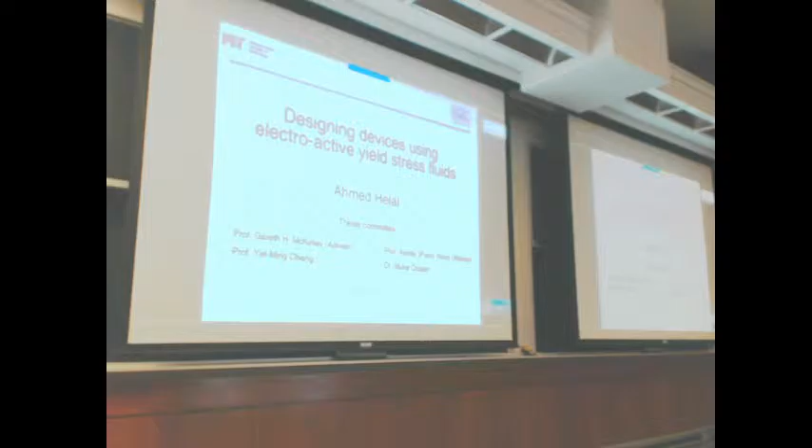Hello, hello, how's it going? You ready? What? It'll be fine, everybody's fine. By the time you get to the stage, it's fine.

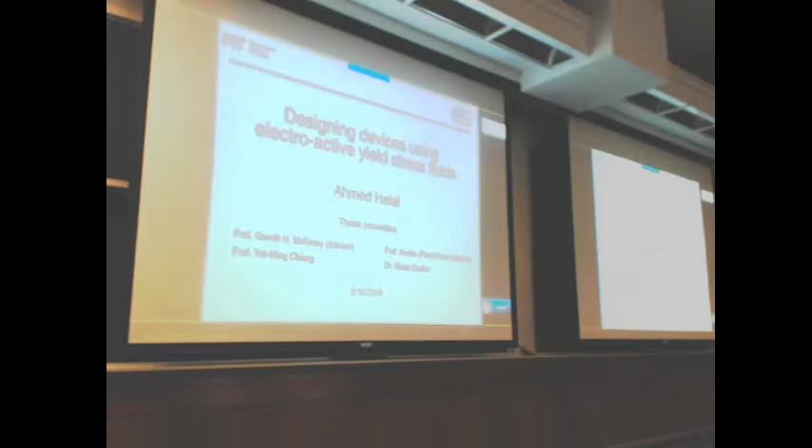Do you think people are watching? 4 people watching. One of them is his parents, probably one of his brothers, I'm assuming. I don't know the name. His parents for sure, and he's a supervisor. He's one of the first guys out here. Maybe some random people that ran into this.

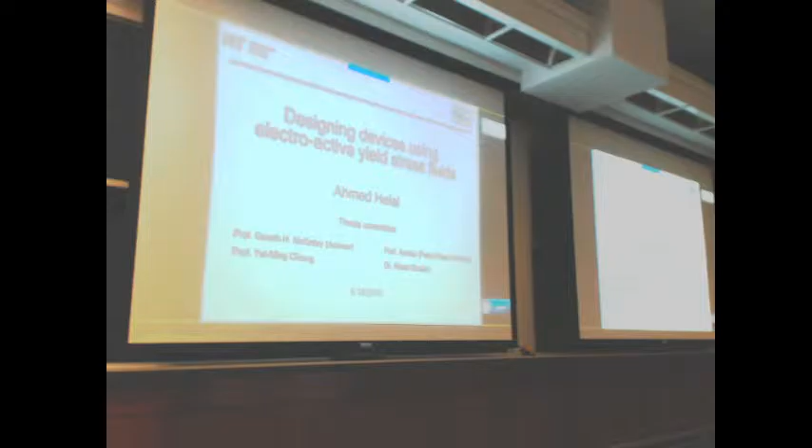Good morning, everybody. It is that time, so we are assembled, and I happened to get a chance version to see Ahmed's invitation to you all. So I know there's a Game of Thrones theme floating around here. This is actually GOT, as in Game of Thesis. And Ahmed is about to roll the dice and play the game, and we'll see if he ends up a White Walker or a graduate.

But to start with, I'd like to say a few words about our candidate today. He came to MIT in 2009, coming from Paris. He was from Egypt originally, but he grew up and spent a lot of time in Paris and going to school there.

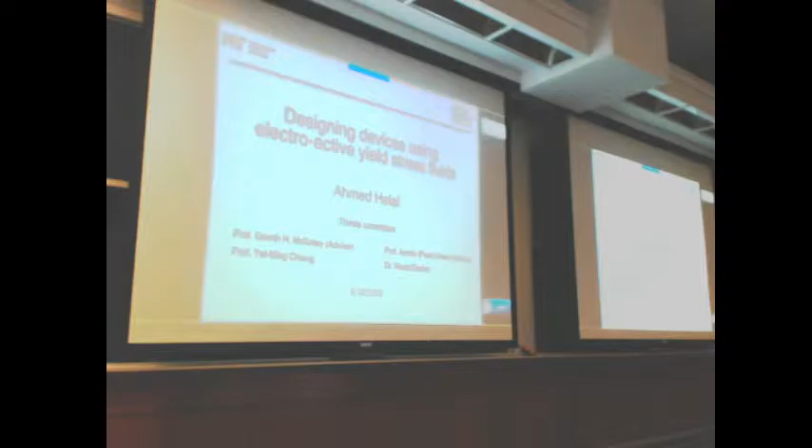One thing I like to do is go down to the archives and dig out the original application essay for said person. When you write the essay to grad school, you think, oh, no one reads this, right? Oh, yes, we do. And you'll notice that Ahmed has one word that he likes to use a lot. But anyway, amazingly, he hasn't strayed too far from what he wanted to do.

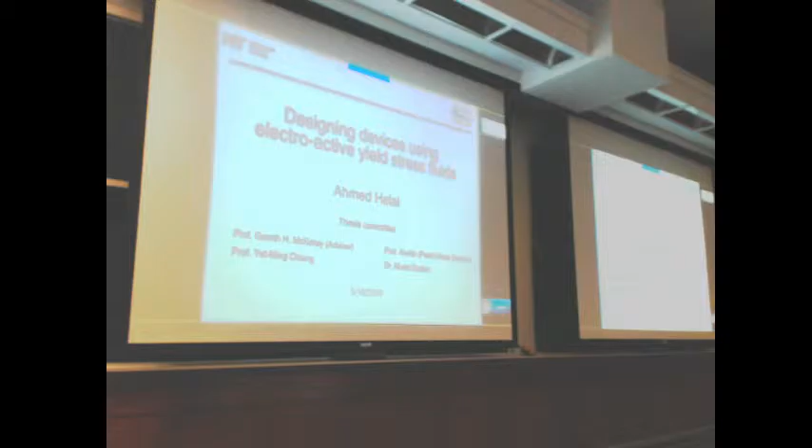He said in his application that he wanted to work in the field of soft matter, and discovered how research in soft matter is interrelated with fields as diverse as biology and electronics, and we're going to see some electrical work here, as well as combining both fundamentals and applied aspects. I think that's something true you'll see in his thesis.

Going on, he told us that during his time in Paris, at the French Grande École, he developed a fondness for physical phenomena and their explanation. I think that's a very French term, to have a fondness for something. We like things that the French have fondness for.

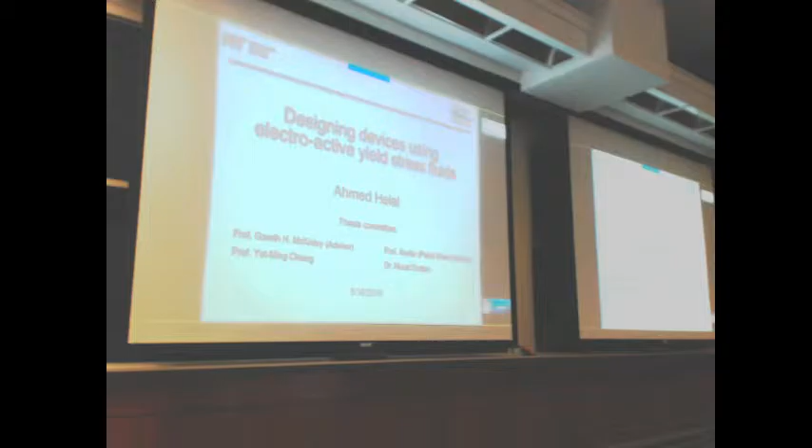So he spent some time with David Quéré, who many of you know, and a class from David Quéré really ignited his interest in soft matter. Then he actually did a microfluidics lab with a guy called Charles Baroud, and he was actually one of those visitors who spent 3 months in my lab when I was at Harvard a long time ago. So there's a connection there - he came as one of those kind of 3-month visitors, and he's gone on to a very successful career there.

And then he spent 6 months doing work at Schlumberger on cementing fluids. Schlumberger is a connection that we've had here over a number of years as well. So he was getting interested in complex fluids more and more and more.

And then, of course, in your essay, you transition to trying to sell yourself to the committee, right? So here's the chain he goes. He explains that he spent some time in Paris, some time in Egypt, and he says, I possess a cosmopolitan outlook. So, does this guy have a cosmopolitan outlook?

Yeah, I'd say so. And then again, I have a fondness for discovering new things and new people. So I hope that he spent some time being very fond of new things and new people while he's here, as well as an adaptability to different situations. I think that certainly summarizes what coming to grad school at MIT is all about.

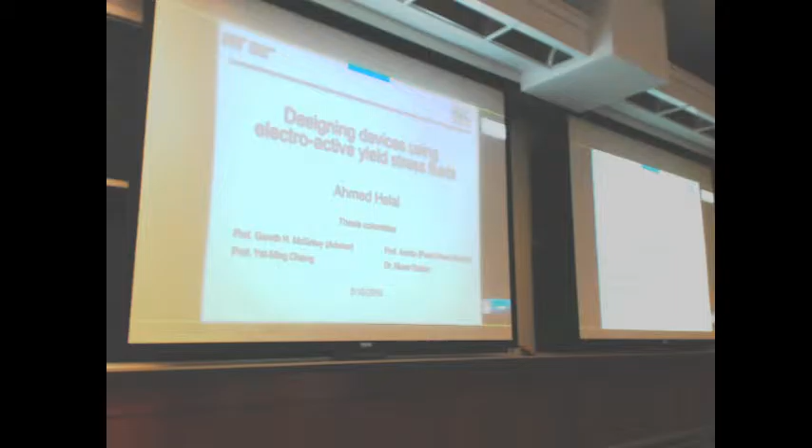And then he ends with saying, in particular, I find Professor Gareth McKinley's non-Newtonian fluid dynamics program appealing, not fond, but appealing, as it dwells on original phenomena in complex fluids. And so, in this case, it's someone who actually came, saw what they wanted to do, and has really strived to get there. And he says, I want to work more particularly on fluid hydrodynamics. So you're going to hear a lot of that.

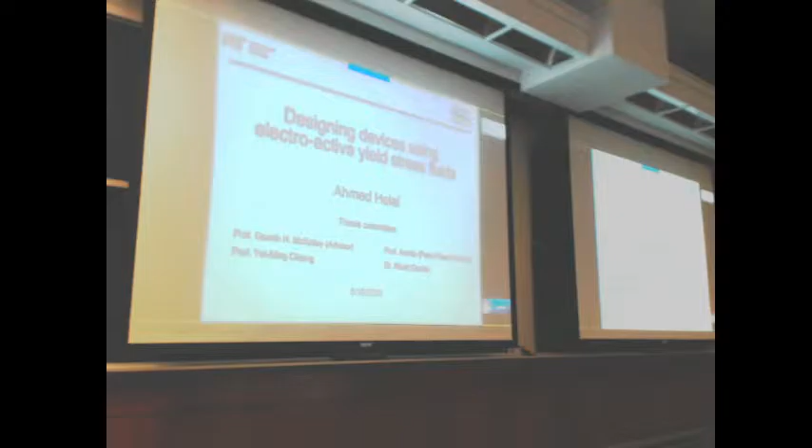But even then, Ahmed was thinking beyond a PhD to what he might do after that. He points out: after obtaining my PhD, I would like to pursue further research. I hope to discover something that will be revolutionary in these common but highly sophisticated materials, and which may mark the passage for a new era that I believe is possible by a deeper understanding of such fluids.

And he's planning to go to work with a company called 24M, which works on very complicated non-Newtonian fluid, but indeed I think you are going to do exactly what you planned all along. So, coming back to the Ned Stark and Game of Thrones thing, I guess I'll be playing the role of Ned Stark today. And instead of a song of fire and ice, what you're going to hear is a song of electrorheology and carbon black. Ahmed. Thank you, Gareth.

Thank you all for coming today. I'll be talking over the next 50 minutes about designing devices using electroactive yield stress fluids. Let me start by defining what yield stress fluids are.

Yield stress fluids are very common in our daily lives. You see them in materials such as toothpaste, face cream, ketchup, and shaving cream. They're basically materials which have a solid-like property, but if you exert some force on them, they will start to flow, like ketchup, for example.

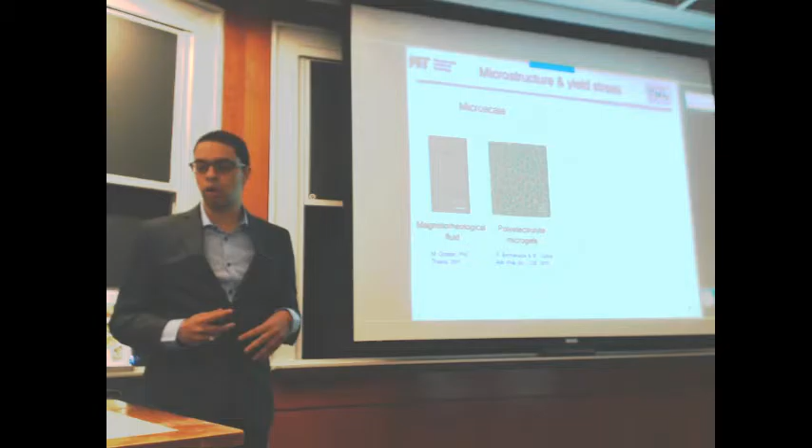They're interesting fluids to build devices with because they can provide functionality due to that nonlinear aspect of their rheology. The reason they have this nonlinear rheology is that they have an underlying microstructure with elements that interact with each other, giving rise to what we call a yield stress.

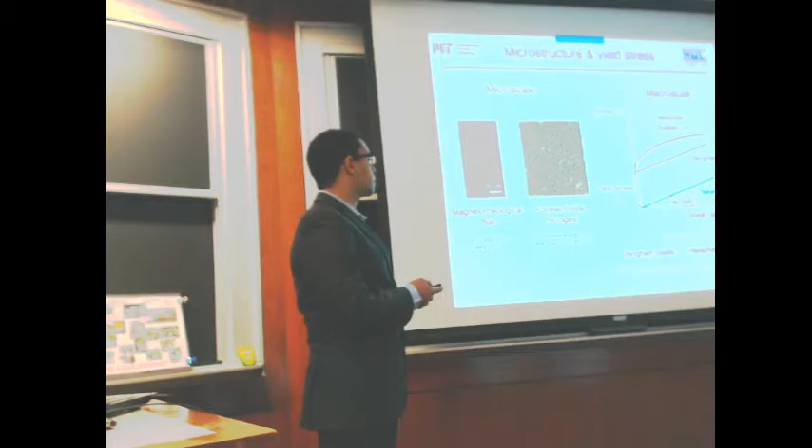When you look at the macro scale, I'm showing here a flow curve, plotting stress versus shear rate. If you take a material like water or oil, the slope has a constant value, and it's related to the viscosity of the fluid.

For yield stress materials, you have a yield stress, and you have to overcome that stress for the material to start flowing. We define two common types of models for these materials: the Bingham plastic model, where after yielding it has a constant plastic viscosity, and a more complex model like the Herschel-Bulkley model, which has shear thinning and more complex behavior once the material has yielded.

We're going to be particularly interested in electroactive yield stress fluids, meaning fluids that have some interaction with an electric charge or an electric field. We're going to look at two specific cases of those fluids over the length of the talk.

Electrorheological fluids are materials which change their properties from solid to liquid with the application of an electric field, and we're going to apply them to build small valves for hydraulic robots. You can think of this case as the low conductivity side of the spectrum, where we want to control the electrical properties of the material and see a mechanical change.

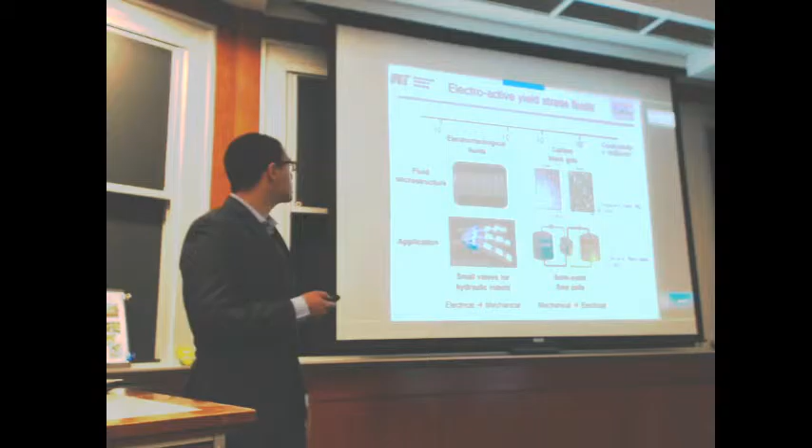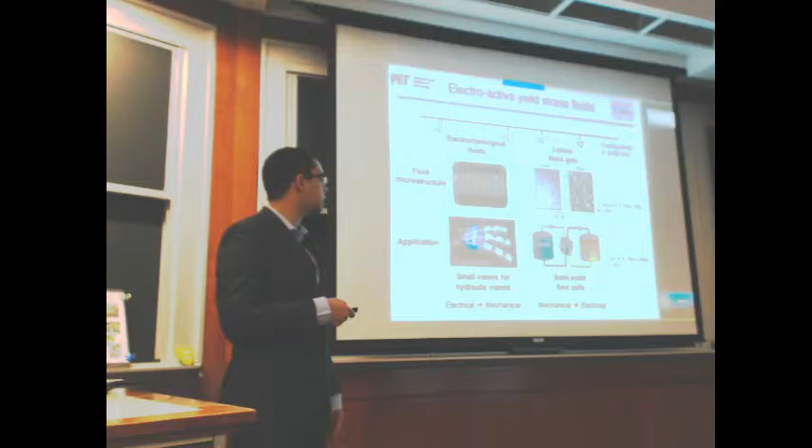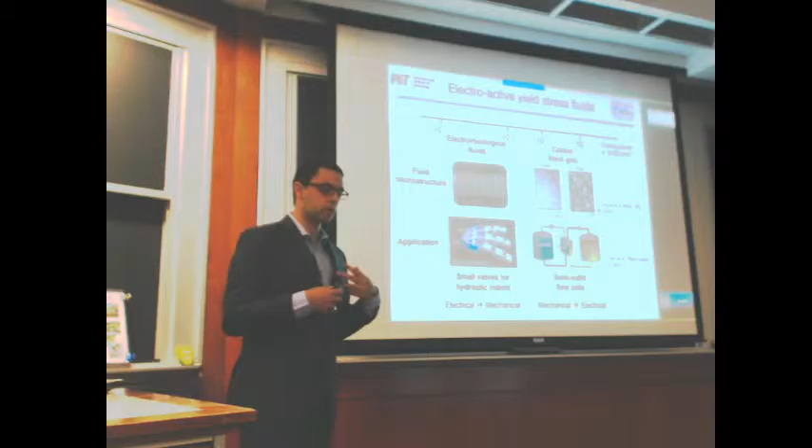The other fluid we're interested in are carbon black gels, as Gareth said, which are higher in conductivity, and we want to use them for semi-solid flow cells, a concept I'll introduce a little later in the talk. Here we're going to do the converse of what I just mentioned: controlling the mechanical properties of the material and then trying to measure and control the electrical properties.

This talk has three goals. First, we want to understand the interaction between the electrical and mechanical properties of these fluids through experimental characterization. Second, we want to develop instrumentation and methods for characterizing and modeling these materials to gain deeper understanding. Finally, we want to link this material-level understanding to design rules for devices at the system level, seeing how material properties can inform design.

We're going to do this for two distinct classes of fluids, the ER fluids and the carbon black gels, and then apply them to robotic ER valves and flow cells. So for the first part of this talk, I'm going to focus on electrorheological fluid characterization.

As I mentioned, electrorheological fluids are basically non-colloidal suspensions of particles that are about 2 to 5 microns in a dielectric medium. The nice thing about them is they have a reversible liquid to solid change with an electric field.

If you look at this video, when the field is applied, the fluid doesn't flow between the electrodes, and when the field is removed, the material flows. This behavior is reversible.

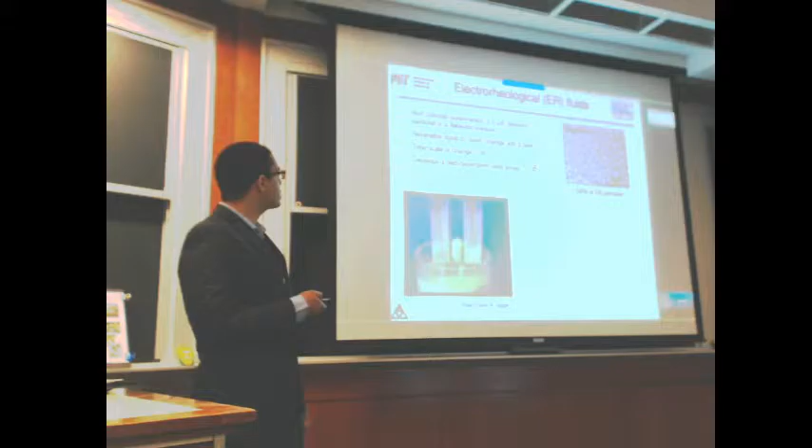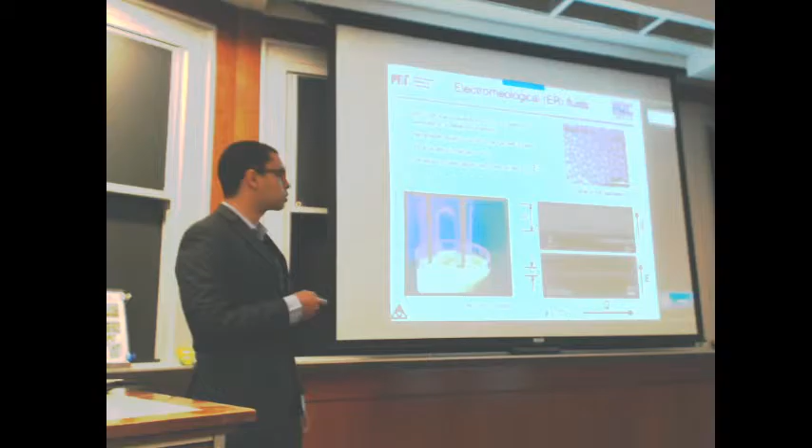The reason we have a yield stress here is because when we apply the field, the dielectric particles chain up and form chains that give rise to this yield stress. As you can see in the second video, this shows that the behavior is reversible, as I mentioned.

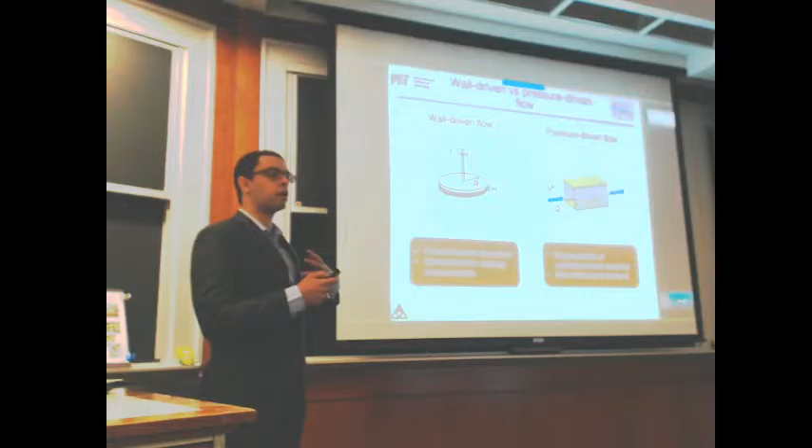We're going to study the electrorheological fluids using two different types of flows. We can look at wall-driven flows, such as torsional rheometers, which are basically the standard for rheology characterization. To define the term rheology, it's basically the science of how things flow.

We want to use this type of flow to understand the fluid flow behavior. On the other hand, we can also look at pressure-driven flows, which are more representative of the applications, such as valves, but are not as standard and more difficult to implement.

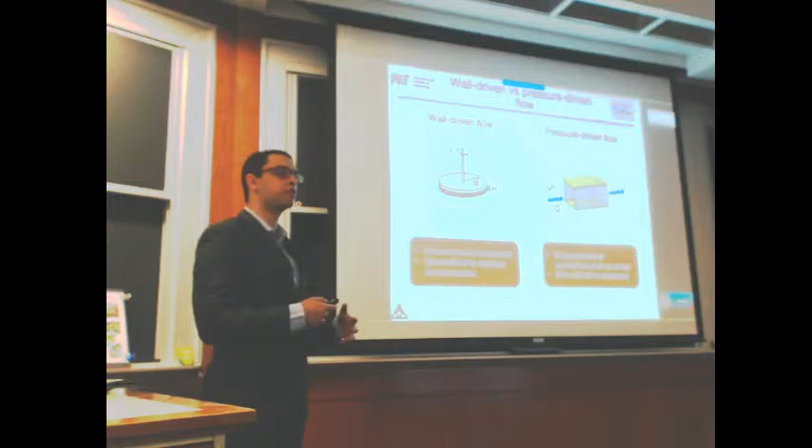What we ideally would want to do is characterize the materials using a wall-driven flow and apply that to pressure-driven flow, so we don't have to build 100 valves to test the fluids. That's what we're going to do.

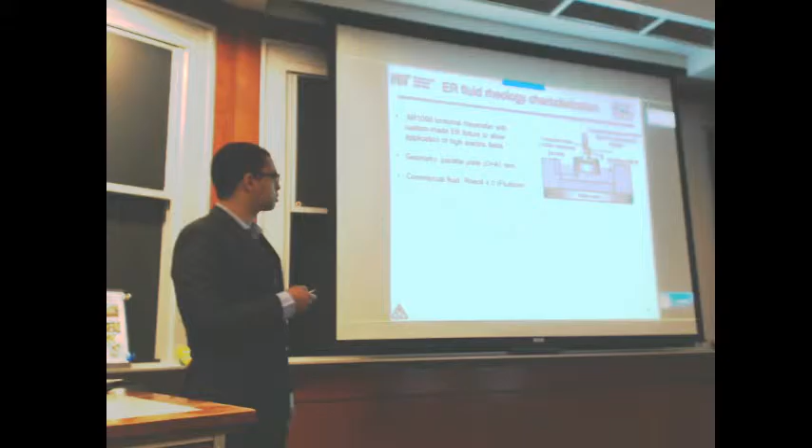We're going to look at wall-driven flow of ER fluids. We built a torsional rheometer with a parallel plate geometry, using a custom-made fixture that uses conducting salt to close the circuit, allowing us to apply high electric fields on the sample and measure the rheology as we apply the fields.

We're going to be using a commercial fluid called Rheoil 4.0 that has been optimized for commercial use and has a very low current density.

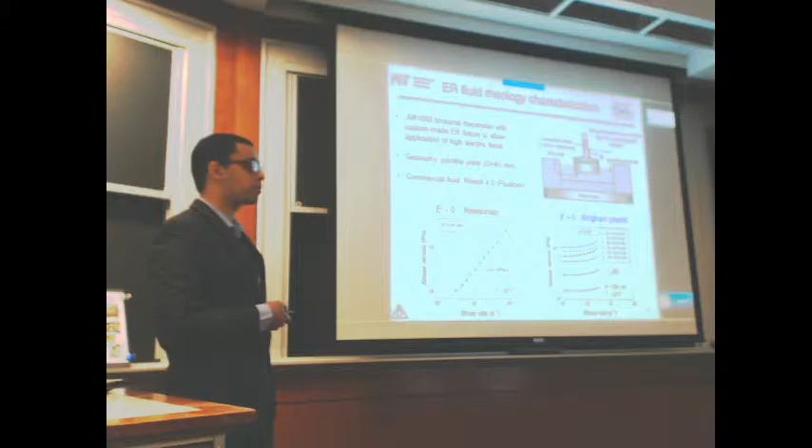If we apply an electric field, we basically have a yield stress material where the yield stress depends on the electric field, and we can model it as a Bingham plastic material.

If we look at the effect of the electric field on the yield stress, we see two things: first, that we were able to get yield stress on the order of about 100 pascal to about 1 or 2 kilopascal, and that the yield stress has a power law dependence of 3/2 with the electric field.

This is when we're higher than 1.5 kilovolts per millimeter. Keep in mind we're applying very high fields here to get this change in the material.

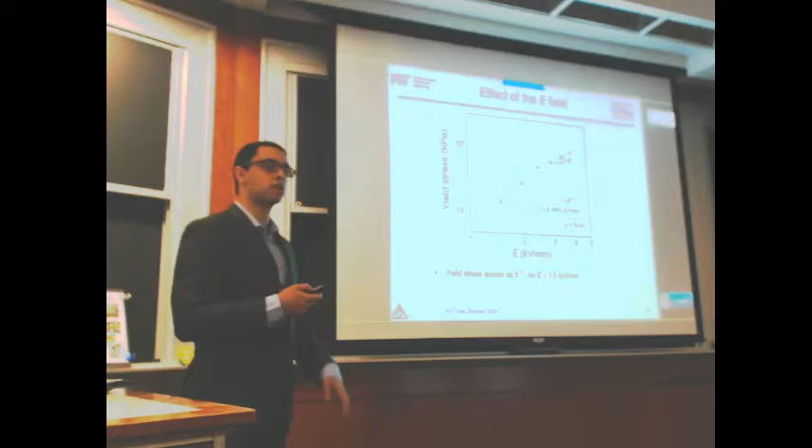We've now modeled and understood the rheology of that material using a wall-driven flow. If we now try to look at a valve and the yield stress we can extract from that pressure-driven flow, we see there's a discrepancy between the two. With wall-driven flow, we're underestimating the yield stress, and we don't understand why.

This is going to be a problem if you want to use rheometers to characterize these materials. So we want to dig a little deeper and try to understand the origin of this effect.

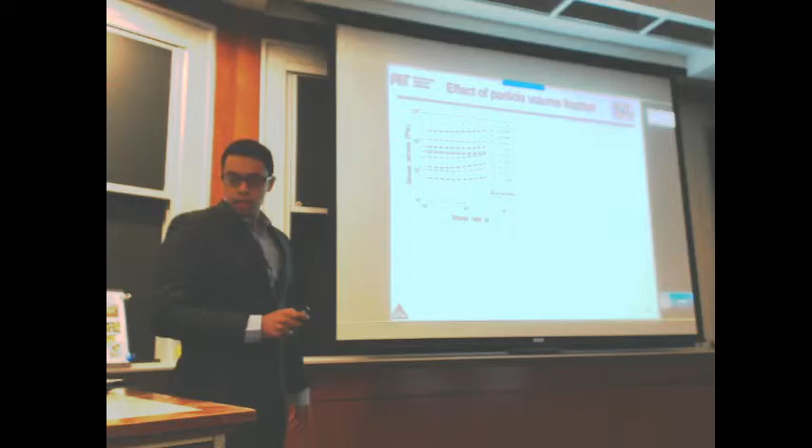There are two parameters that control the yield stress of the material: the field, which I already showed you affects the yield stress, and the particle volume fraction of particles in the fluid.

We went ahead and created a series of fluids with volume fraction varying from 0 to 55%, and we measured their rheology at a fixed field of 3 kilovolts per millimeter.

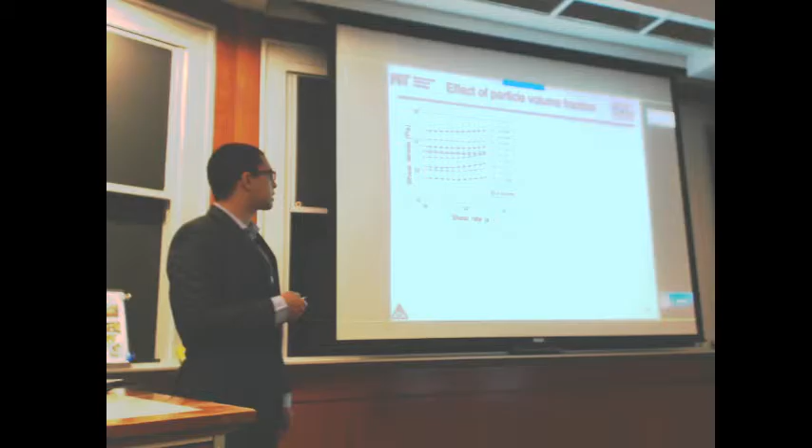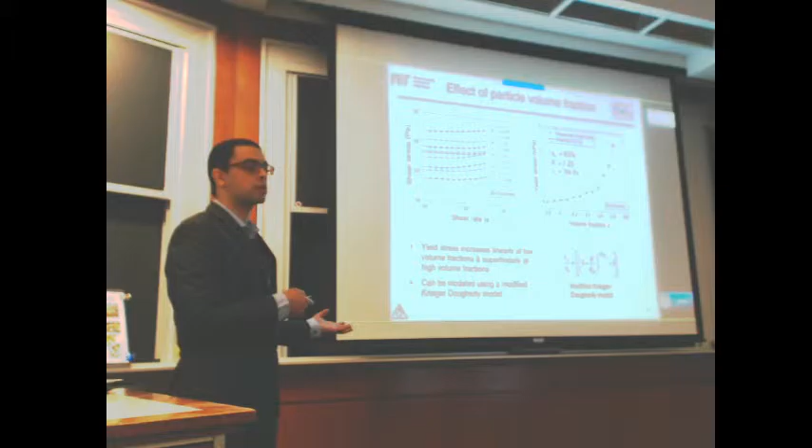If we now look at yield stress versus volume fraction, we see, as expected, that when there are no particles, we don't have a yield stress in the material. As we increase the volume fraction, the yield stress increases, initially linearly and then faster than linear at high volume fraction.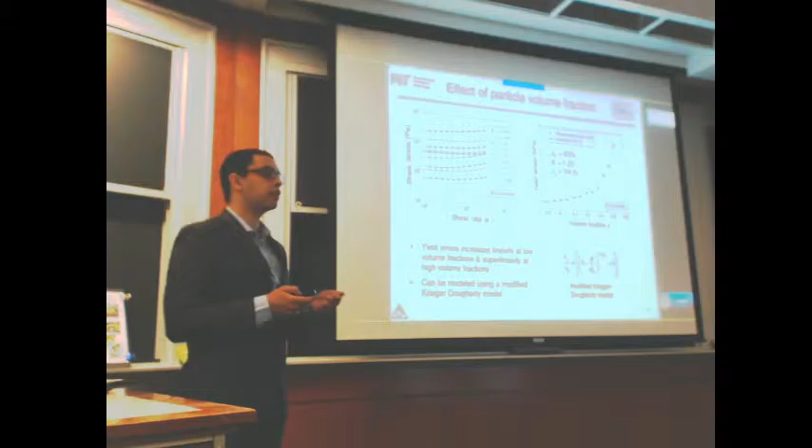We can model this using a modified Krieger-Dougherty model, and you can see that it is in good agreement with the data we show. So we understand how both particle volume fraction and electric field affect the rheology in a wall-driven flow.

So let's go ahead and look at the effect of doing the same tests in a pressure-driven flow. We designed some channels where we can apply an electric field across and visualize at the same time, as you can see here, and we went ahead and tested them.

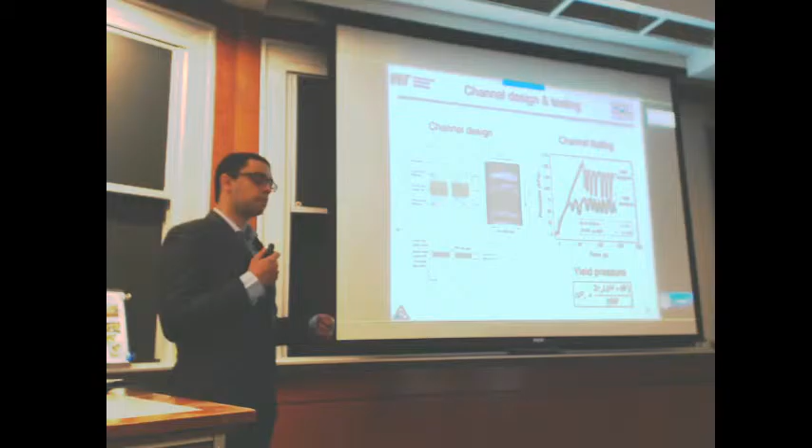The way we tested them is we basically pushed the fluid with a syringe at a given flow rate of fluid, and we watch the pressure rise in the channel. You can see that initially the pressure rises, and then when you reach the yield pressure of the valve, the valve breaks basically.

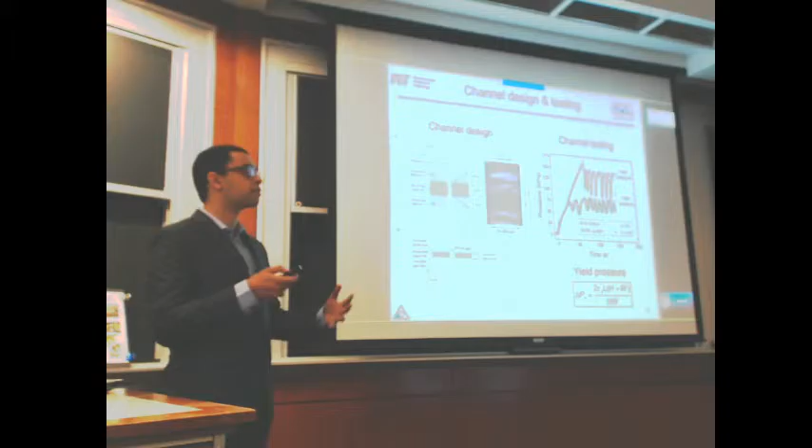You can see these oscillations because when the valve breaks, the electric field is still applied, so the particles chain up again and reform and close the valve again, and then the pressure rises again until you reach the yield pressure again, and that happens over and over.

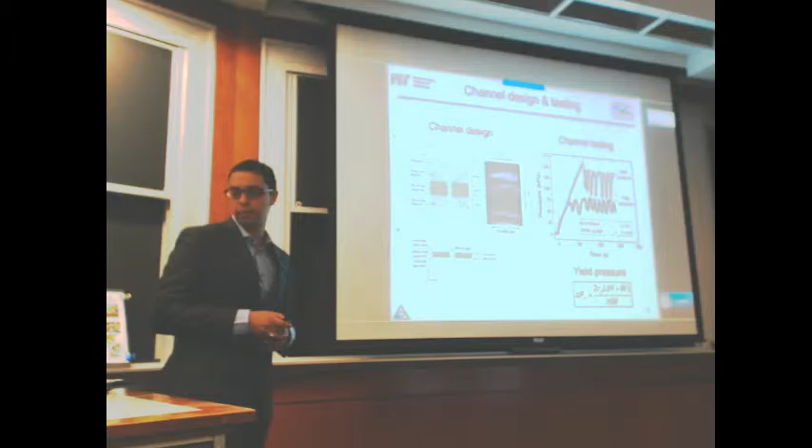We can do a force balance on an element of fluid in the channel, and we can relate the yield pressure that we measured here to a yield stress in that setup case.

Now let's compare, for all the volume fractions we measured earlier, the yield stress in the microchannels for different flow rates and the yield stress measured in the wall-driven flow. You see that for all the volume fractions tested, the yield stress in the channel is consistently higher than the yield stress measured in the rheometer.

The way to think about that is that the rheometer setup is basically a closed system. The amount of particles in your measurement is constant, versus in the channel you're introducing particles continuously, and the particles get stuck, causing an increase in the volume fraction in the channel.

The other thing we notice is that at high volume fractions, there's a saturation of the yield stress with volume fraction. We can think of this as particles getting into the channel and getting stuck until they reach a maximum packing fraction of about 53%, phi m.

So we wanted to model this behavior as well, and try to reconcile the differences between the wall-driven flow and the pressure-driven flow. We introduce a ratio of time scales in our system.

First, T alpha, the structure formation time describing how the structures form, which depends on the electric field, and then a convection time scale, which tells you how fast you're piling particles in your channel if you start from this volume fraction, with the max volume fraction being phi m.

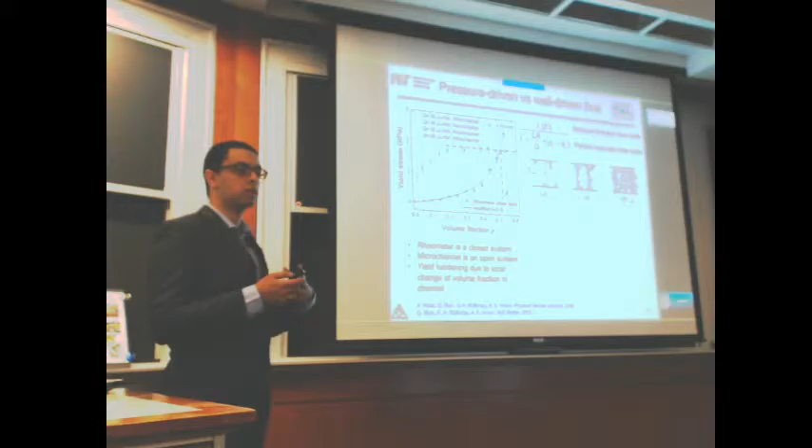We can look at the two extreme cases. In one, you apply a very strong flow rate and the particles don't have time to form structure, so you end up with practically an empty channel. In the other, you give the particles enough time to reach optimal packing in the channel, ending up with the maximum packing fraction we discussed.

To model this, we go through the permeability of this porous media and define the two extremes: the permeability at the maximum packing fraction, and the permeability of an empty channel with no particles at all in it.

We propose a phenomenological relationship that interpolates between the two using this time scale and an exponential function, and we relate that permeability back to the volume fraction using a relationship demonstrated on this specific fluid using optical measurement by Chen and previously in our lab.

So if we know the permeability that the material reaches for each ratio of timescales, we can extract the volume fraction that forms in the channel, and then look on the curve characterized in the wall-driven flow to get the yield stress at that point. The dotted lines represent this set of parameters for our model, and we see good agreement between our model and the data we collected.

So what we've shown is that we can basically understand the physics in pressure-driven and wall-driven flows, and we're able to reconcile the differences between the two. If we know the dependence of the yield stress on the volume fraction, we should be able to reconcile data we collected on the rheometer and data we collected in the channels, and do device characterization accurately.

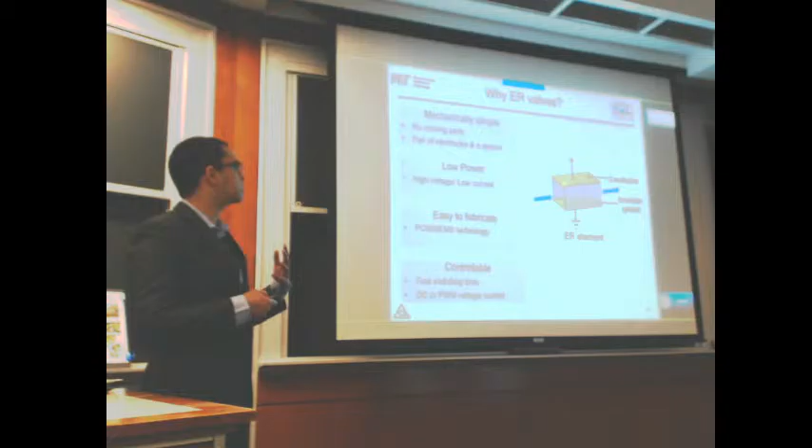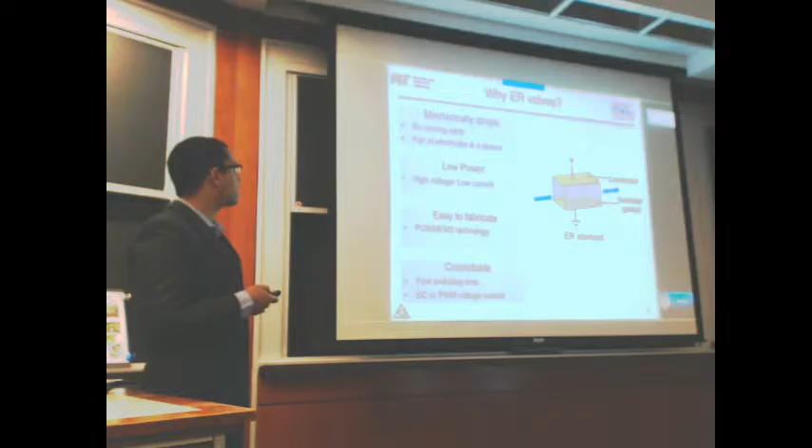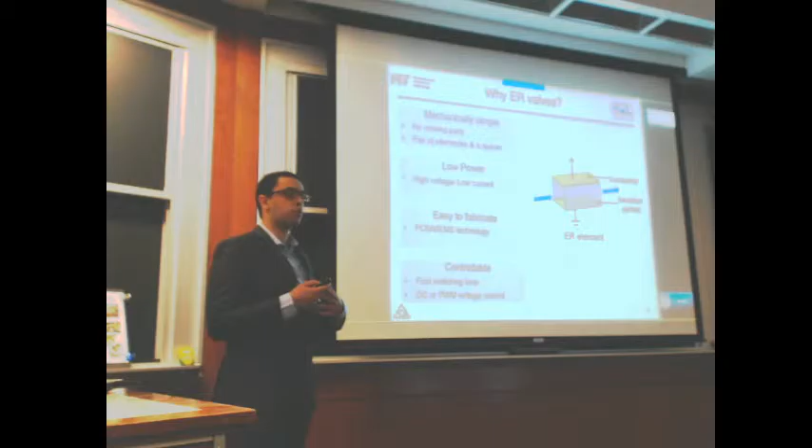The nice thing about ER valves is that they're mechanically simple. There are no moving parts—it's just a pair of electrodes and a spacer. They have low power: we're using a high voltage, or a high electric field, but the current is very low in the system.

They're relatively easy to fabricate because we can make use of existing PCB technology to make the device very small. And as I mentioned, they have a fast switching time because the fluid itself has a fast switching time.

The other nice thing about them: if you try to build small valves for robotics, you'll find that they're very big and very expensive, which prohibits the widespread use of small hydraulic robots. Versus ER valves, which are very versatile and can be made very cheaply using PCB technology.

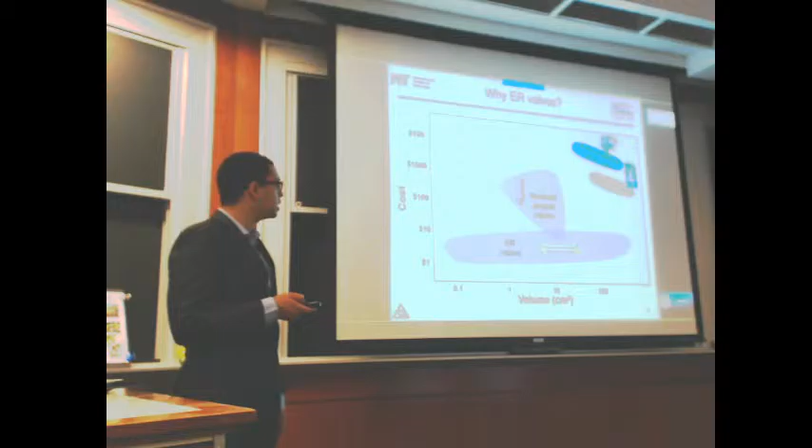So we investigated the valve design space, and in collaboration with Boston Dynamics, we were able to fabricate valve prototypes using PCB manufacturing methods. You can see here these are basically 5 or 6 parallel valves where the fluid is going through, shown from a different perspective to give you a sense of scale.

We were able to use these valves in designing a small flexible gripper, made as a tentacle, where you have different digits and the ER valve is controlling the flow between each set of digits. You can see precise control of the motion of the gripper using the ER valves.

It's nice because we're now able to use these valves for robotic applications, and there are other examples I'm happy to discuss. If you want to see more robots that use these things, you can ask me later and I'm happy to show you.

So that's what I wanted to say about the ER fluids—we were able to characterize them and build the valves and characterize their design as well. Now for the rest of the talk, I'm going to switch to carbon black suspensions and flow cells, starting again with the characterization part.

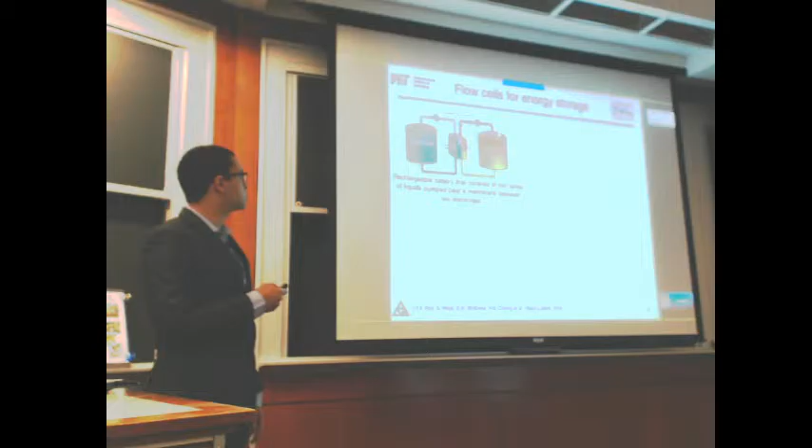Flow cells are basically a rechargeable battery that has two tanks, and you can pump the material from the cell back into the tanks to store it. This allows you to decouple the energy and the power of the cell, because the power is set by the size of the cell, but you can have a tank as large as you want, and that controls the amount of energy in the cell.

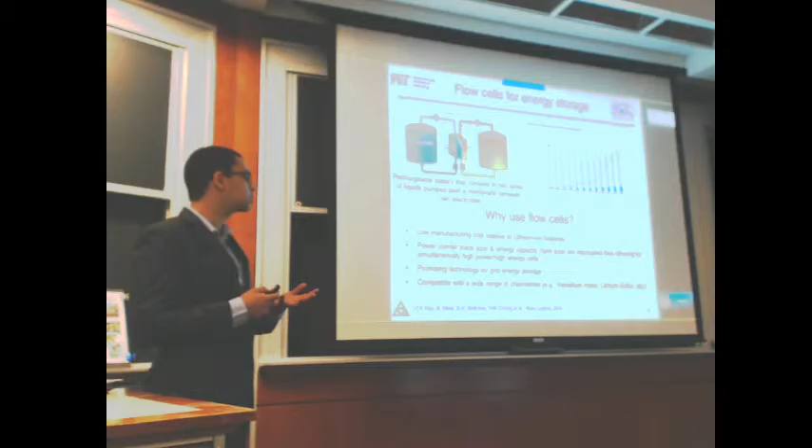So why use flow cells compared to other cells? There's a growing need for grid-scale energy storage because of the increased integration of renewable energy into the grid. As I mentioned, flow cells allow you to decouple energy and power, which allows you to have a high power and high energy cell through the design process. They're compatible with a wide range of chemistries, which can have very high energy densities, making them a promising technology, and they're low cost as well.

In a typical flow cell, you flow a Newtonian electrolyte solution through a stationary conductive electrode, such as a carbon felt or porous carbon felt. This can lead to large pumping losses and a very dissipative flow because you're flowing through pores that are very small in the carbon felt.

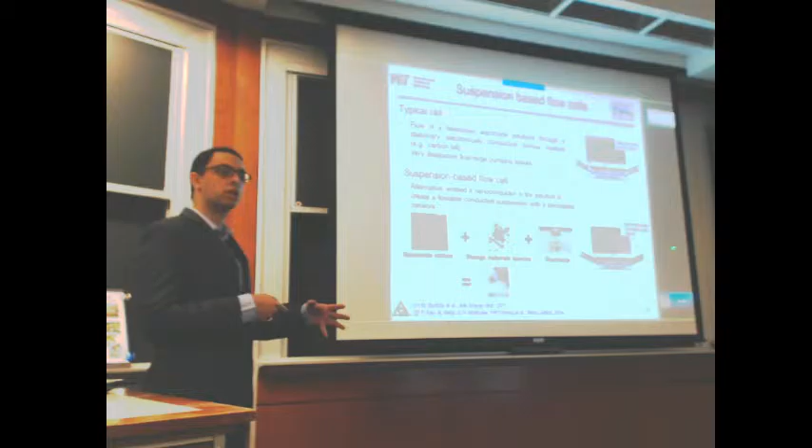An alternative approach, shown here at MIT by Professor Chiang's group, was to instead of pumping into a stationary electrode, embed the conductive material directly into the suspension and flow the whole thing through the cell. That's what we're going to call a semi-solid flow cell or suspension-based flow cell.

If you look at these pictures, you see that these are not your typical hard spheres suspensions. They're very fractal particles, and they have a short range of attractive potential, which causes them to basically form gels through a fractal network using diffusion limited aggregation.

So basically we have a fractal network at the scale of the particle and at the scale of the suspension. And we're going to be using that as a random conductor in the semi-solid flow cells.

We're going to be looking more closely at the lithium sulfur chemistry because it has the potential for high specific energy of the cells, and it also gives rise to high cell voltage in a non-aqueous solvent.

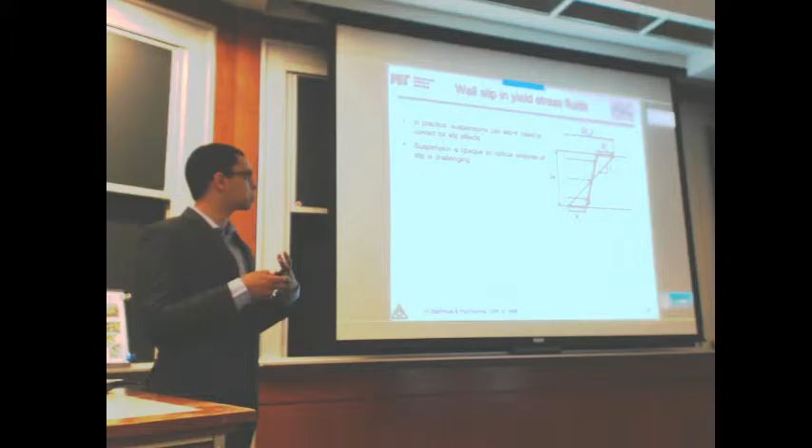To do that, we're going to use the parallel plate geometry and work done by Yoshimura and Prud'homme, and the measurements at multiple gaps, to correct for the slip effects in our system.

So in the parallel plate geometry, we can write down what the stress at the rim is and the rim shear rate. As you can see in this figure, we can derive a kinematic relationship between the true shear rate applied to the material, the apparent shear rate we think we're applying, and the slip velocity. They're all linked through the gap.

So what we do is for a given stress, using this kinematic relationship, we plot the apparent shear rate versus the inverse of the gap, for multiple gaps, and fit a linear line through. The slope will be twice our slip velocity, and the intercept will be our true shear rate for that given stress.

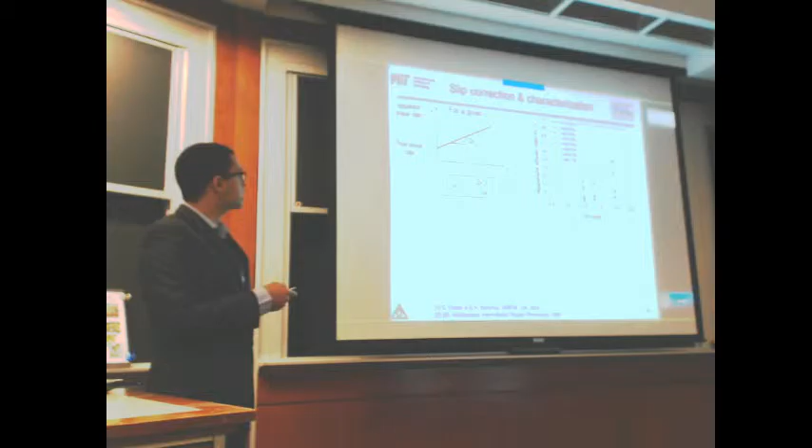Here's an example that we did for the 1.5% Ketjen black suspension. You can see that we get what we expect, basically we can fit a linear line through properly. And we can then get, the first thing we can get, basically, is the slip velocity.

You can see here I'm plotting the slip velocity against the stress, and you see that we get a linear dependence of the slip velocity with stress.

But you also see that we have a critical stress below which the material does not slip. So we can model the slip in the suspension using a slip law that looks like this formula, where below the critical stress the material doesn't slip, and above the critical stress it slips based on the stress.

The idea of critical stress is basically associated with the fact that you need to exert some work to have an adhesive failure at the interface before the material starts slipping.

The other thing we can get is the true flow curve of the material, which is plotted in black here, which is the open symbols that you can see. And when I overlay the apparent flow curves at different gaps that I've shown you earlier, you can see the apparent flow curve shows...

...three different regimes that are going to be important for the device later. Below a stress of about 25 pascals, the material does not slip, it does not flow, there's no flow in the system. Between 25 and 56 pascals, the material is basically slipping, but it has not yielded.

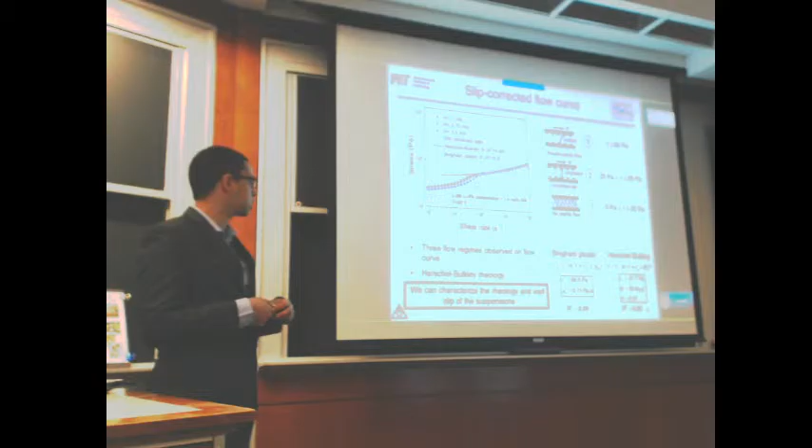Precisely, and this is what I'm going to show you, where I want to link now the information we've gained at the material level to a system level model to help the design.

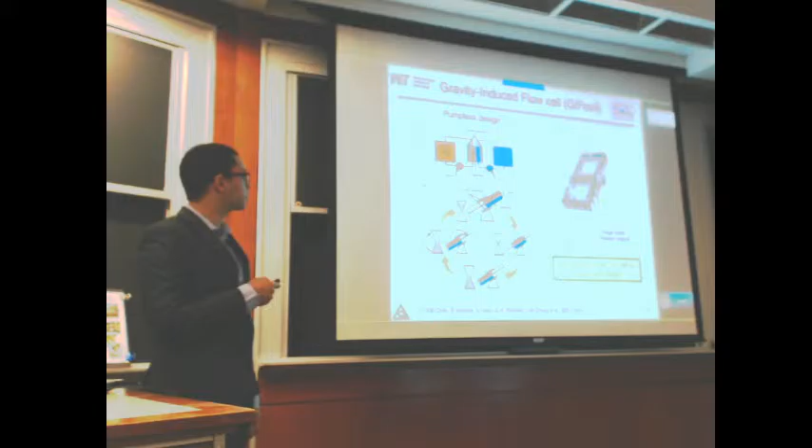And specifically, I'm going to be talking about gravity-induced flow cells, which is a new type of flow cell architecture that was introduced here in the Chiang lab. Instead of having what I showed you earlier, pumping the fluid into tanks, we basically have gravity as the driving mechanism of the cell, and think of it basically as an hourglass where you put the material in one side and then let it flow and then flip the hourglass basically.

And it's nice because we don't have any pumps or things to maintain or things that will break down basically in our system. These can be made very cheaply and they can be very modular. So it's a promising architecture for semi-solid flow cells.

And what we want to do is model the flow in the cell to help guide the cell design. So if we look at the cell, to give you a sense of how big the lab prototype is, the length of this tank is about 7.5 centimeters.

And if we take an element of fluid in the cell, we can do a force balance on it and derive what the shear stress at the wall is. You can see that it's basically constant. For a given angle, it's a constant stress that's being imposed at the wall for the material.

So what I'm going to do over the next few slides is show you how we can design a semi-solid electrode to fit the needs that we want, and how we can balance the electrochemical constraints and the rheological constraints of the material to make sure that this material can flow through the cell basically.

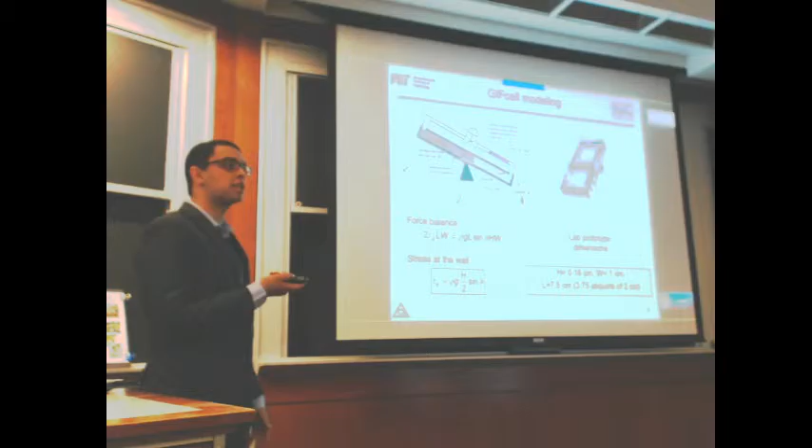So the first thing we want to do is design our materials. We want to pick the correct solvent to use. We've been working with the Glyme family. Within the Glyme family, we can pick different glymes of different length of the molecule.

And we can see that if we look at the cell discharge for a 0.5% Ketjen black suspension, the shorter the glyme, the better the performance of the cell, and we can reach a higher capacity of the cell. So what that tells us is, from an electrochemical perspective, we want a shorter glyme to get better kinetics and better cell performance.

If we now look at the rheology of the material at 0.5% Ketjen black, we see that the rheology is relatively independent of the choice of solvent used. That tells us we should pick the shortest glyme available, which would be diglyme. But diglyme has a very high evaporation rate, making it hard to operate with.

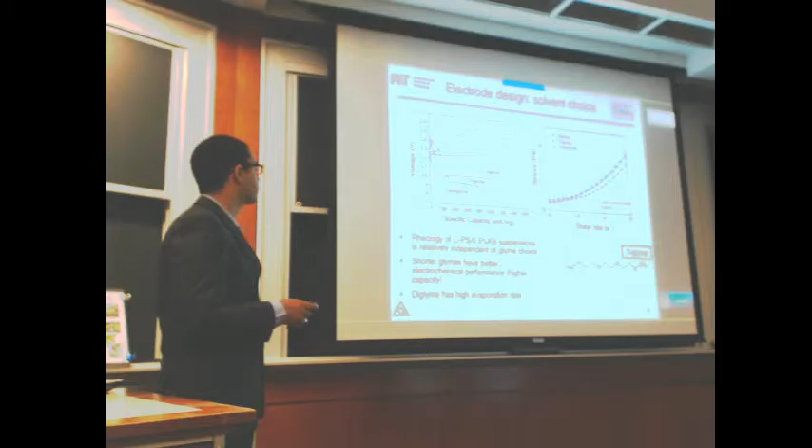So we're going to pick triglyme as our solvent of choice for testing in the cell. Now that we've picked the solvent, we can vary the carbon loading. I can put a lot of carbon and get very good electrochemical performance because the conductivity will be high, but the material will probably have a very high yield stress and will not flow. Or I can put a very low amount of carbon and it will flow nicely, but with low conductivity and poor performance. So we expect a trade-off between these two parameters in the carbon composition.

If we do the calculation we did earlier for different loadings in carbon black, we can extract the yield stress of the material and plot an Ashby plot showing yield stress versus electronic conductivity. As we increase the carbon loading, the yield stress increases and the conductivity increases accordingly in our system.

So how are we going to decide what carbon loading to use in our cell? We're going to look at the angle for onset of flow in the cell—the angle below which the material will not flow at all, which would be an issue for cell design. In the case of no slip, this is given by a specific relationship.

This angle is shown in the color code here, and you can see that if you were to use 1% carbon black, even at 90 degrees the cell will not flow.

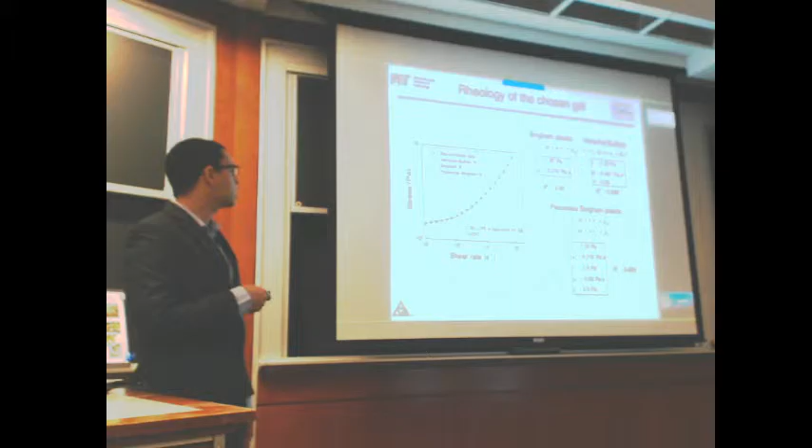For the modeling, we can use a Bingham plastic model, which makes for easy flow models in the cell, or the Herschel-Bulkley model, which fits our data better but makes it much harder to derive equations for the flow in the cell. To compromise, we define a piecewise Bingham plastic model within the range of shear rates we've measured, which keeps the linearity of the model in terms of shear rate while also getting good agreement with the data. These are the input parameters into the model we're going to use.

The other thing we want to control is the slip in our system, so we measure different surfaces—for example, Teflon, which is a high-slip surface compared to stainless steel. When we do this characterization, we see, as expected, that the slip on Teflon is much higher than the slip on stainless steel.

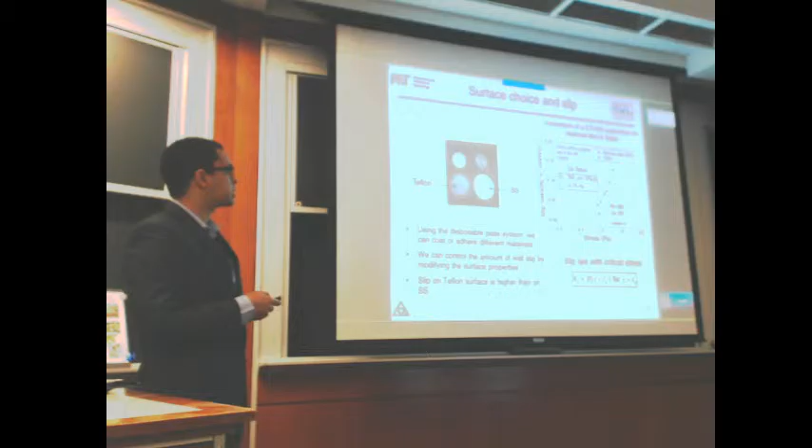For a 0.5% carbon black solution, it does not slip on stainless steel, but it does slip on Teflon. We can compute the slip law parameters that we're going to use as other inputs in our model.

Now if we look at how we're going to model the flow in the cell, we assume a high aspect ratio channel, where the width is much bigger than the gap between the electrodes. As shown earlier, we have three regimes, similar to how the flow curve had three regimes. We have two non-dimensional numbers that control which regime we're in, basically tau-C-star and tau-star, comparing the stress at the wall to the critical stress to slip and the yield stress.

If you're below the critical stress to slip, your material will not flow at all. If the stress at the wall is between the critical stress to slip and the yield stress, the material is going to be slipping, and we can derive the relationship with the flow rate in that case.

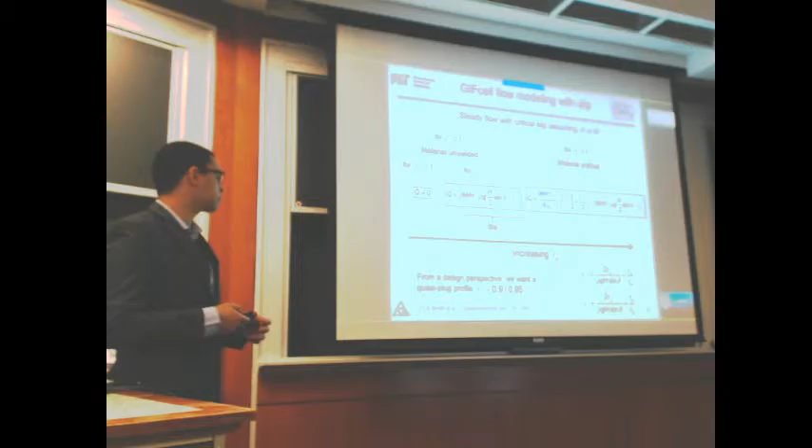If the material yields, we have a component due to plastic deformation and a component due to slip. From a design perspective, the ideal case is a plug-like velocity profile, because work previously done by Kyle Smith and collaborators showed that this maximizes the energy efficiency of the cell. So we want tau star around 0.9 to 0.95, right after the material has yielded, but not only dependent on slip and surface defects. Using those equations, we can compute the flow time for one pass of the cell.

Think of it as flipping an hourglass: how long does it take for the material to flow to the other side once flipped? We can look at the effect of introducing a slip surface in our device on the flow. If the black curve is a stainless steel surface and the red is a Teflon surface, we see that enabling the material to slip increases the range of operating angles in our system.

Now let's compare this model to the experimental data we measured. The model predicts for 10 degrees about 4.9 minutes, and for an angle of 11 degrees, 3.2 minutes—so it's very sensitive to the angle. What we observe experimentally is about 4 minutes. The model gives us the right range of flow times in the device because we have accurately characterized the rheology and the slip of the material.

Overall, ideally you want the flow time from one side to the other to be about 5 to 8 hours, to give enough time for the cell to discharge. Right now, we are basically always under an hour for most angles, and it's extremely sensitive to the angle.

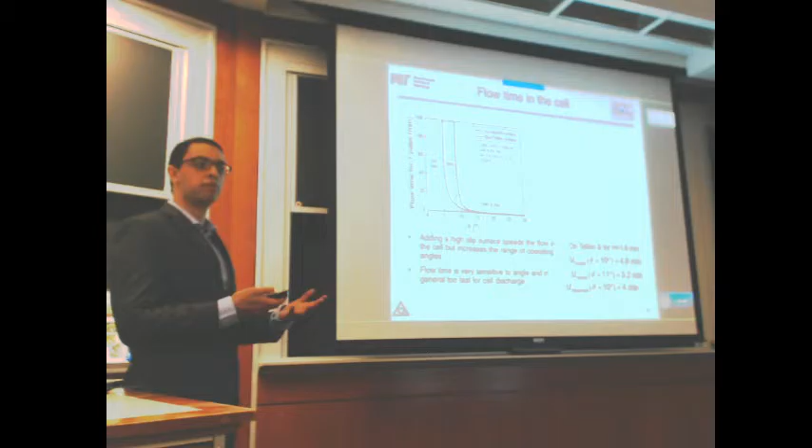So we want to slow down that flow rate without having to redo the cell design to figure out which configuration works. Using the model, the first thing we can think of to slow the flow rate is to reduce the gap between the electrodes, because there's a nonlinear relationship between the flow rate and that dimension.

For a Teflon surface, we can look at changing the gap, making it smaller. What you see is that, for a given angle, yes, it increases the time for the material to flow, but it also significantly reduces the range of operating angles. At the end of the day, within the range of gaps that would be easy to manufacture, we're still nowhere near where we want to be in terms of time. So we need to find another solution to slow down the flow in that cell.

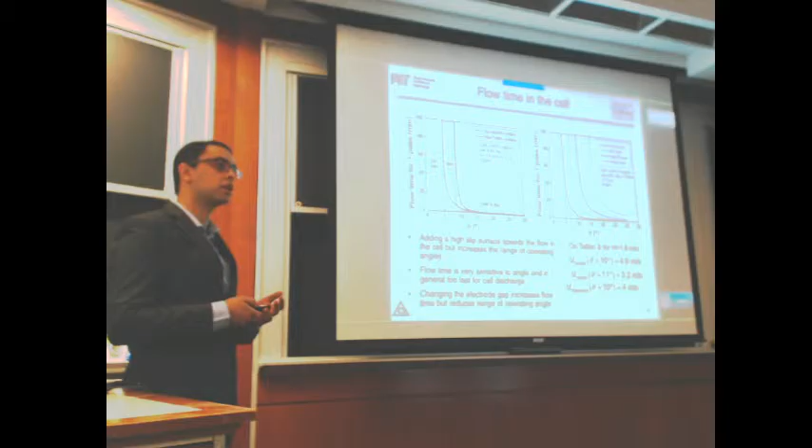The way to do that is to introduce an airflow control element in the cell—think of a valve or membrane that slows down the flow of air, since it's a closed system. That acts as a feedback loop that slows down the flow of the electrode material in the system. We define the parameter alpha as the flow resistance of that element in our system.

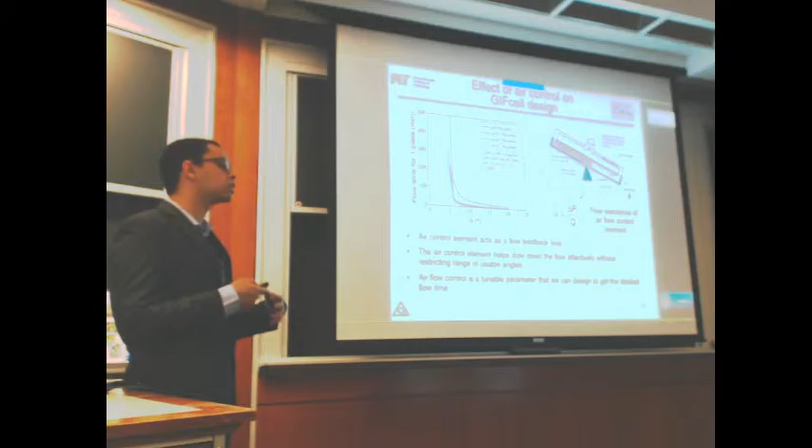If we redo the modeling, which is a bit more complex but doable, we see that changing alpha—where the red curve is what we had earlier with no flow control element—doesn't change the range of flowable angles, but lets us control the flow time significantly, up to 500 minutes if we wanted. This tells us an ideal cell design would include an airflow control element and slip, to get the biggest range of operating angles while controlling flow time accurately. The nice thing is that this element becomes an extra design parameter we can tune to get exactly the flow time we want for a given device.

Okay, in the time that's left, I want to discuss a process to measure the conductivity of the suspensions under flow. If you imagine that we are flowing this network of carbon black, when it's being sheared, the network will break down and the conductivity will drop consequently. We want to be able to characterize that so we can input it into our models for the performance of the cells, and not just rely on the static measurement of conductivity.

To do that, we can do measurements of conductivity in DC, where we apply a constant potential. I want to emphasize that phi from now on is the potential, not a volume fraction compared to what we had earlier, with confusion. We're short on Greek symbols once we start mixing multiple fields together.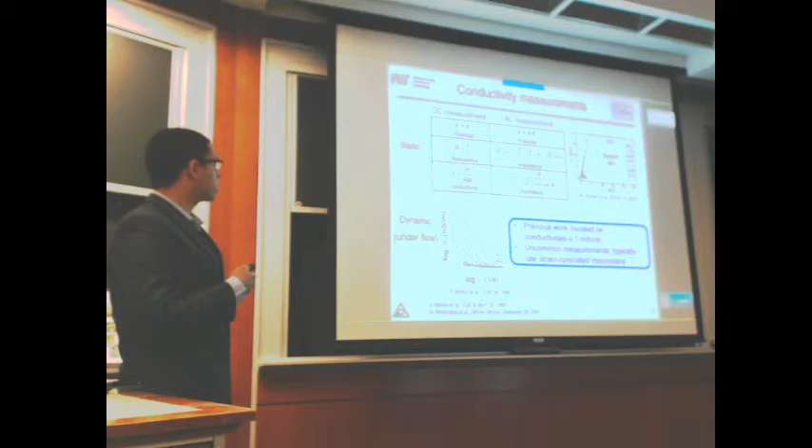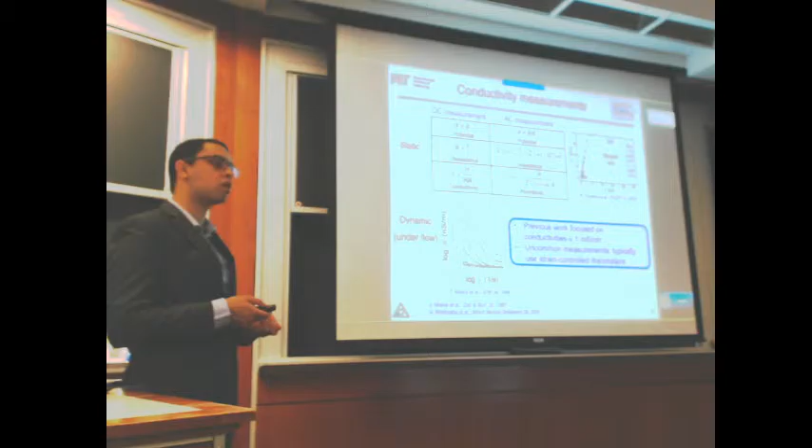We can look at who has done measurements of conductivity under flow in the dynamic case. There are a few measurements, but they're relatively uncommon and tend to rely on strain control rheometers, which are relatively rare and very expensive. In general, most of the previous work has focused on very low conductivities, much less than 1 millisiemens per centimeter, which is not the range we were interested in for flow cell applications.

So we wanted to build a test fixture to do these measurements on a stress control rheometer that we have in the lab. The complication is that you have to close the electrical circuit in the material, and whatever you're connecting to the rotating shaft is going to have high friction that will mess up your rheology measurements. So you won't be able to measure stress and conductivity simultaneously.

We looked at different methods that have been introduced in the past for these types of measurements on stress control rheometers. The first way is to use a gold spring—it's nice because it's not toxic, and it allows you to measure conductivity in both AC and DC, but it has very high friction because it's solid friction with the shaft.

You can also think of an ionic solution, similar to what we looked at for the ER fluids. It's safe, but it only allows measurements in AC, because the salt will polarize and you'll get a very complicated electrical signature of the salt itself that's hard to decouple from what you're measuring in your sample.

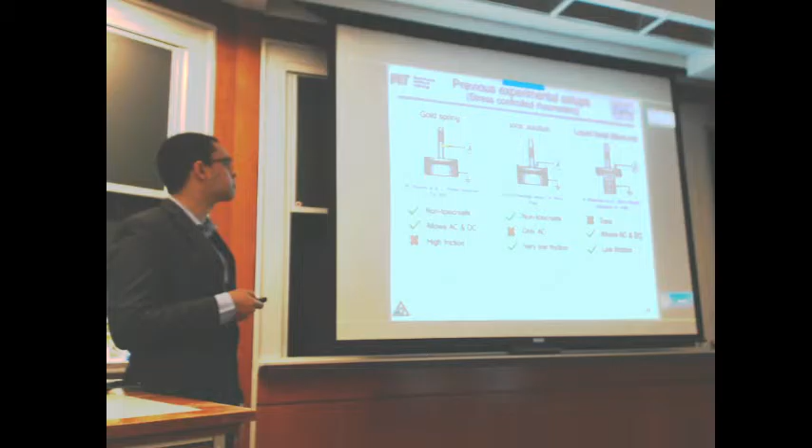Finally, you can use liquid metal. What has been used in the past is mercury, like Professor Watanabe did—definitely low friction, allowing for both AC and DC measurements—but it's very toxic, and we're certainly not going to do that.

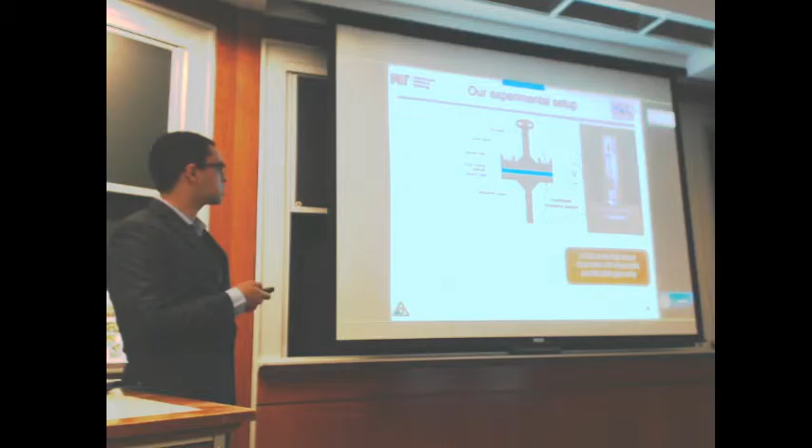So we came up with an experimental setup to do that. Here is the parallel plate geometry I showed you, on our stress control rheometer. The material is sandwiched between the plates, and the plates act as electrodes. We've coated the plates with sputtered gold.

The reason for that: when doing a conductivity measurement with two electrodes, what you're measuring has a component from the material—the bulk resistance—and a component from the contact resistance at the interface, which tells you how easy it is for electrons to pass through that interface. If it's a gold surface, you reduce the contact resistance, and you're able to measure a material with lower bulk resistance, meaning higher conductivity.

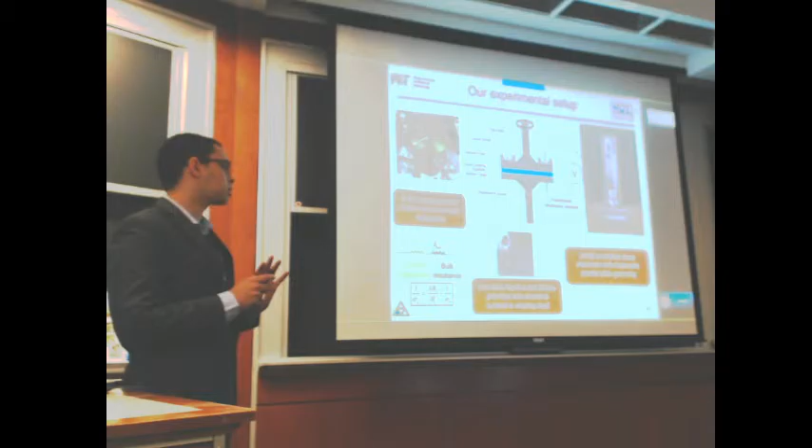And we wanted to see how that compares to the existing method that I showed you earlier. So we first did a friction calibration of our setup, and this is just the torque that you get from the setup with no sample in the test fixture for different methods of connecting the rotating shaft.

As you'd expect, the liquid metal has a much lower friction than the gold spring. But the nice thing is it's relatively independent of the angular velocity, so it's going to be a very easy correction to do this calibration and correct for it.

So we can look at how that would look for a calibration Newtonian fluid. The red curve that you see here is what you would get on a normal rheometer without our setup, and you see it's a Newtonian material. The blue lines you see here is basically the calibration that we did, and you can see that the friction of the gallium is about 1 Pascal.

If we now measure the calibration fluid using our setup, you get the purple line here. You can see there's a deviation between what you measure with and without the fixture because of the friction. And now if we do the correction by subtracting the liquid metal friction, you see that we're able to recover the correct flow curve of the material.

This tells us that we now have a stress fixture that allows us to do simultaneous measurements of rheology and conductivity, as long as we're operating at a stress that's higher than the friction here, which is going to be the case for most suspensions we're interested in.

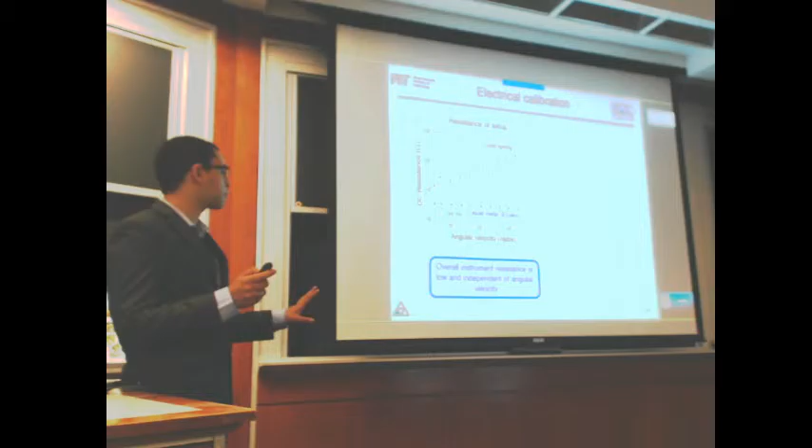We use a calibration ionic solution from Oakton with a conductivity within the range we're interested in measuring, and if we do a contact-resistance calibration correction, we can recover precisely, using this setup, the conductivity reported by the manufacturer. So obviously we can use this setup to do accurate measurements of the conductivity of the suspensions.

So now let's use it on our carbon black suspensions. We're now switching to a different type of carbon black that's a simpler system, using VXC72R as our carbon black, which is a carbon black that's been widely studied in the literature, so we can compare our results to other people. And we're putting it just in mineral oil to have a simple system.

This is a model suspension to work on because it does not evaporate, it does not age, and it's very nice and well studied before. So if we now look at, we'll do a simultaneous measurement of stress and conductivity at the same time.

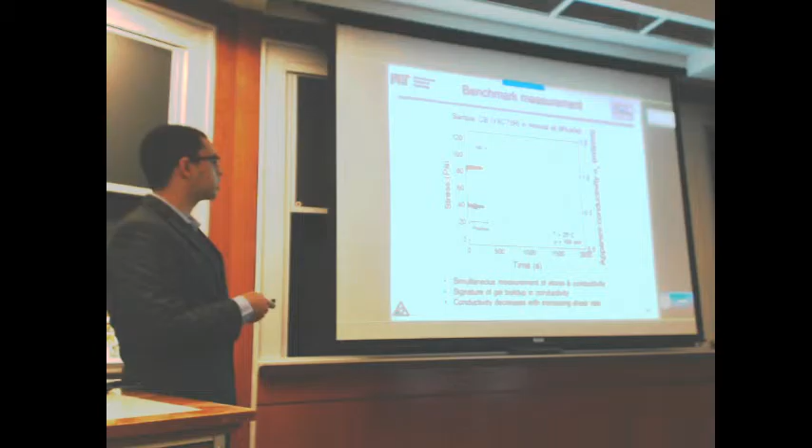We can see that if we shear the material at 100 per second, we're able to reach a steady state for both the stress and the conductivity in the measurement. And if we now stop the flow, the stress will go to zero, and you can see that the conductivity recovers as the gel is building up again under static conditions.

The nice thing is, if we now start applying the shearing again, when the material reaches the same values and the system is reversible, the results are reproducible. And you can see if we increase the shear rate to a higher shear rate, the conductivity drops, which is what we expect because the network gets more broken.

We want to look at the steady state curves and try to model the conductivity versus shear relationships that we want to use when we try to model this behavior.

We can do the measurements simultaneously for different gaps, doing a stress ramp from a high stress of 100 Pascal down to 0 at certain points, spending 30 seconds per point.

You can see that we get flow curves that are gap dependent, which tells us that there are some slip effects happening at low shear rates.

But also, when you look at the conductivity, at high stresses the conductivity decays with stress as we expect. But at low stresses, we see a gap dependence again, which indicates some contact resistance effects kicking in that we would have to correct.

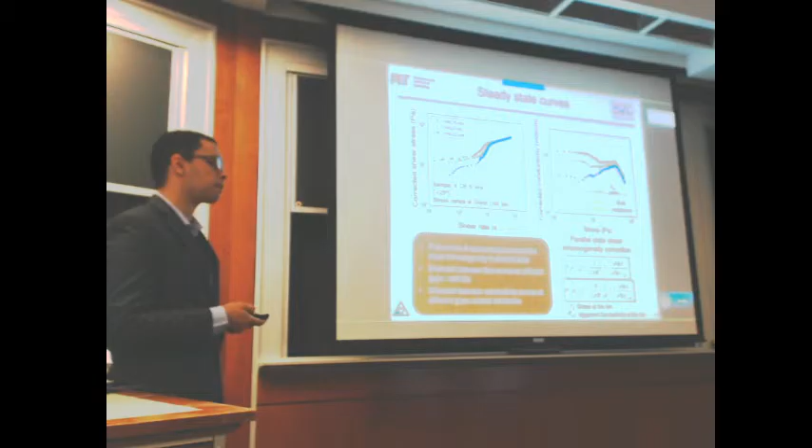In a parallel plate geometry, the shear rate is inhomogeneous across the gap and across the radius, and we typically use a relationship like this to relate the torque we measure to the stress at the rim. We've derived, for the first time, a similar relationship to correct for the effect of shear inhomogeneity in the parallel plate to compute the conductivity for the shear rate.

Similarly, I've shown you how to do a slip correction using a multiple gap method. There's a one-to-one analog for contact resistance, where we can plot the apparent resistivity versus the inverse of the gap, and the slope will be our specific contact resistance, and the intercept will give us the resistivity.

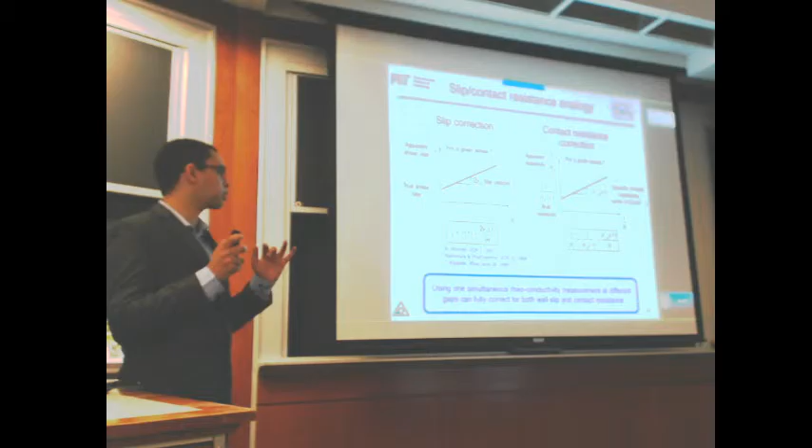To keep the analogy going, we're going to do this for each given stress as well. The nice thing is that now, using this setup with simultaneous measurements of rheo-conductivity at different gaps, we should be able to correct for both the slip and the contact resistance at the same time, which is exactly what we did.

You can see here the black curve is the true flow curve that we get for the material, and we have a complex dependence of the slip velocity, bulk conductivity, and specific contact resistance with stress.

I'm going to walk you through what's happening. If we start at high stresses and go down, reducing the stress, we basically see that the bulk conductivity is increasing as the gel builds up because we're applying this small stress.

This continues until we reach about 60 Pascals, where we see a constant slip velocity with stress, which tells us the material is fundamentally flowing as a plug. We can see the signature of that also because the bulk conductivity does not vary, since the material is flowing as a plug and is not being sheared.

Then when we go to very low stresses, we see interesting behavior where both the contact resistance and the bulk conductivity shoot up, which tells us there's some sort of microstructural change happening in the material.

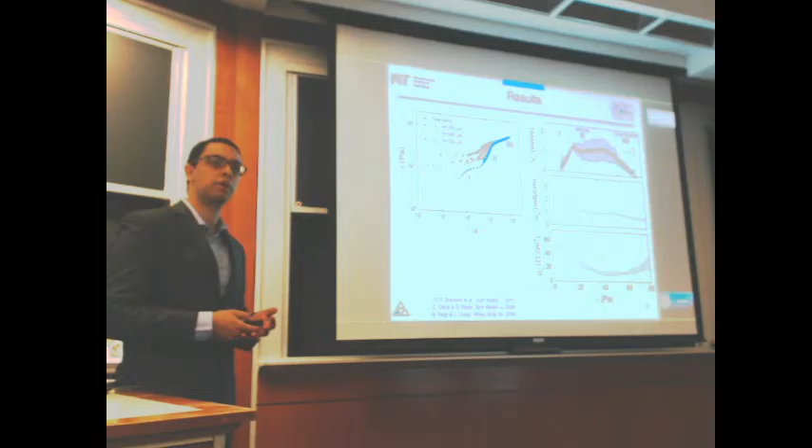We can look at the literature to try to understand what's happening. Previous work done by Vincent Grenard and Thibault shows that below a critical shear rate, carbon black materials can form vorticity-aligned flocs, where the material phase separates into these lines, versus the homogeneous case you can see there.

So we can say that we expect this change in conductivity is a signature of that effect. Because they've derived the exact relationship for this material describing the critical shear rate with the gap, the points you see in open symbols here are where we expect some vorticity line formation is happening.

You can see that all of those are happening below a stress of about 20 Pascals, which confirms our thoughts that this behavior is a signature of that effect.

It's also nice that these results show, for the first time, that we can decouple the true rheology and conductivity from the contact resistance and slip. By doing that, we can gain additional information on how the material is flowing, whereas if we only had the rheology data, we would not be sure what's going on in this case.

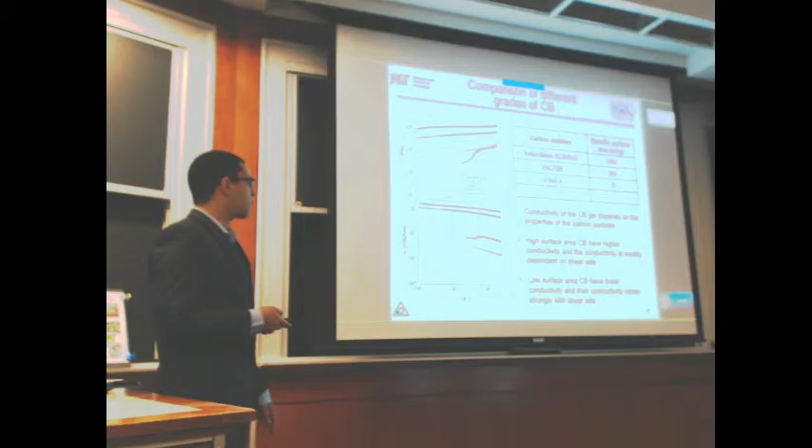We also observed two things: the carbon blacks that have a high surface area—XC72R and Ketjen black, the black and red here—have a high conductivity, but also a weak dependence on shear rate. The conductivity does not vary strongly with shear, which makes them nice for flow battery applications because we know we won't lose orders of magnitude of conductivity when flowing the cell. Compare this to the other two, which have low conductivity to begin with, but also a very strong dependence on shear, where conductivity drops by almost an order of magnitude within the same range. Again, they're not meant to be conductive materials, so we agree with that.

To conclude, I told you we had three goals when we started this talk. One was to understand the interaction between the electric and rheological properties of the materials, and we did that for ER fluids across different electric fields and particle volume fractions. We proposed a model to reconcile the differences between wall-driven and pressure-driven flows, and demonstrated that the yield hardening in pressure-driven flow is due to the local increase of volume fraction of particles in the system, modeling the physics of that process. We also characterized the rheology and wall slip of carbon black gels and showed important parameters we need to take into account when modeling flow in the cells and devices.

We looked at the effects of solvent—how the solvent, surface properties, or carbon loading affect these properties in our gels. As I mentioned, there is a trade-off between the mechanical and electrochemical properties when designing semi-solid electrodes, so having these characterization methods is very useful to guide your design.